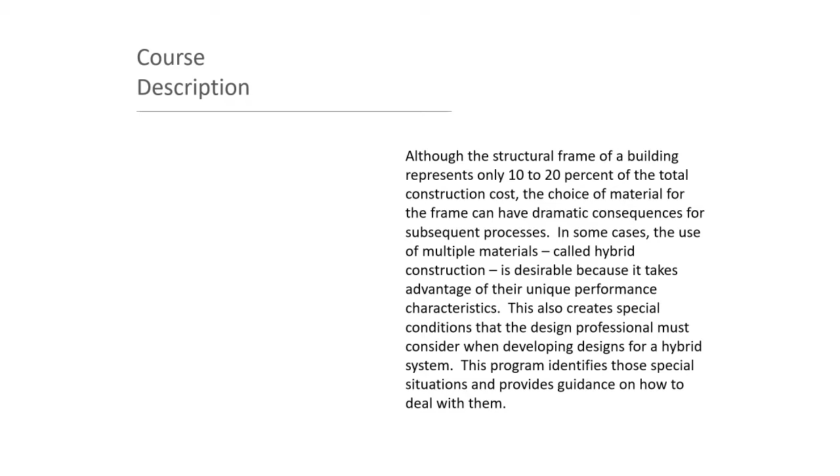The presentation will cover 4 primary objectives. Participants will have a thorough understanding of the following at the conclusion of the program: first, the circumstances under which a hybrid design might be desirable; second, the basic considerations when evaluating different materials and systems; also, the design process associated with hybrid structures; and finally, how to solve common conflicts associated with hybrid structures.

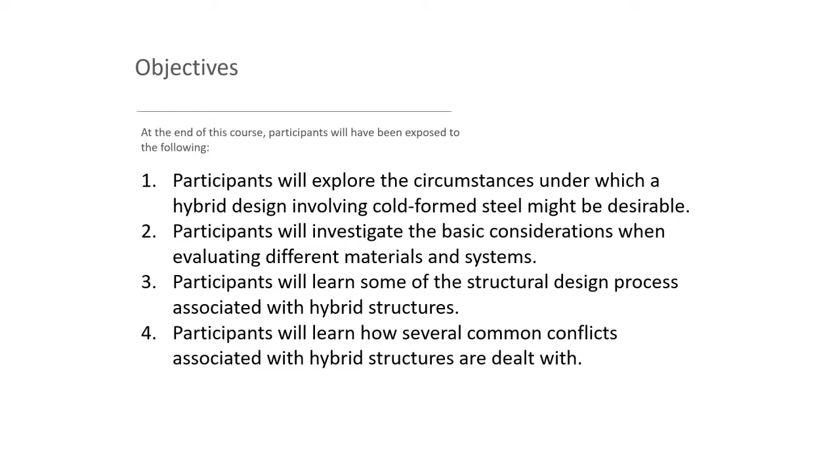The main structure on that car was cold-formed steel unit body construction, as was the case with many post-1961 American automobiles. In the old days, before advanced automotive engineering, to create a convertible they would form the original car - in this case one of the last years of GM's beautiful A-body muscle car - and they would cut the top off. The roof essentially acted like the top flange of a beam on a unit body car, so cutting an entire flange off considerably weakened the structure.

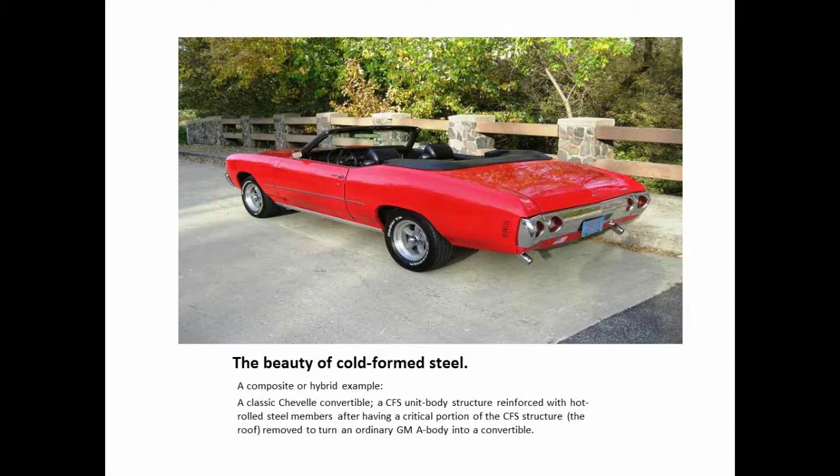In order to regain some strength, they would routinely take small hot rolled sections and weld them into the rocker panels on the sides of the car to help regain some strength. So this is, after a fashion, a hybrid cold-formed structure.

Now, regarding building structures, hybrid is defined as something heterogeneous in origin or composition, or composite. In the case of building structures, nearly every structure we do is a hybrid to some degree, or at least fits that definition. In this presentation, we're going to look at structures that use large, or at least significant, portions of different materials to comprise different portions of the overall building.

As far as the benefits of doing so, the designer is compelled to take advantage of the inherent positives of each different assembly. It almost goes without saying, because to do otherwise does not necessarily lead you down the road to using a hybrid structure, or at least making that a decision.

Walls, on the other hand, are amongst the most efficient load-carrying elements known to man. In the old days of architectural education, many of you - I know I was included - were taught in terms of lines and planes. C-stud walls are a plane, a vertical load-carrying plane, and as far as load-carrying capacity to mass, there is virtually nothing, at least that is commonly used, that is as efficient in the world of structural engineering as a cold-formed steel stud wall.

It also has relatively low cost versus other commercial, industrial, and institutional construction assemblies, for instance cast-in-place concrete, precast, or CMU, etc.

There's a potential high speed of construction using prefabrication. And frankly, in the world of cold-formed steel, or load-bearing mid-rise cold-formed steel, which is what we're dealing with here, if you are not prefabricating at least the wall framing on that project, frankly, you're not doing it right.

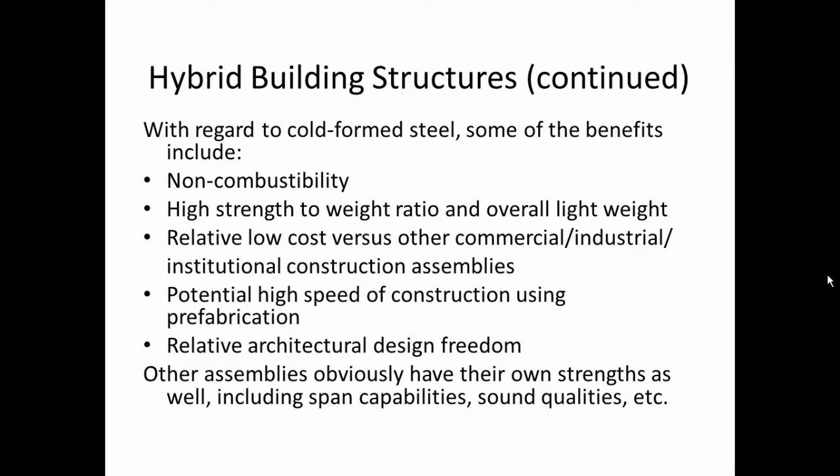Again, with regard to hybrid structures using cold-formed steel, there are several assemblies that are used with some regularity along with cold-formed steel as the primary structural frame. The ones we'll glance at today include cold-formed with precast concrete plank or hollow core, long span deck, and wood framing, which we actually won't touch on now.

The hybrid assemblies we've dealt with in our office that involve wood framing generally use the cold-formed for the strength advantage and the addition of a lower story or stories, and it's almost as if they're sort of cheating the system on the code. So we won't really talk about that very much.

Cold-formed with bar joists or composite joists, which nowadays can involve either cold-formed joists or hot-rolled steel bar joists as the composite joists. And then the one we'll actually spend the most time looking at, with a specific case study, is cold-formed with hot-rolled steel.

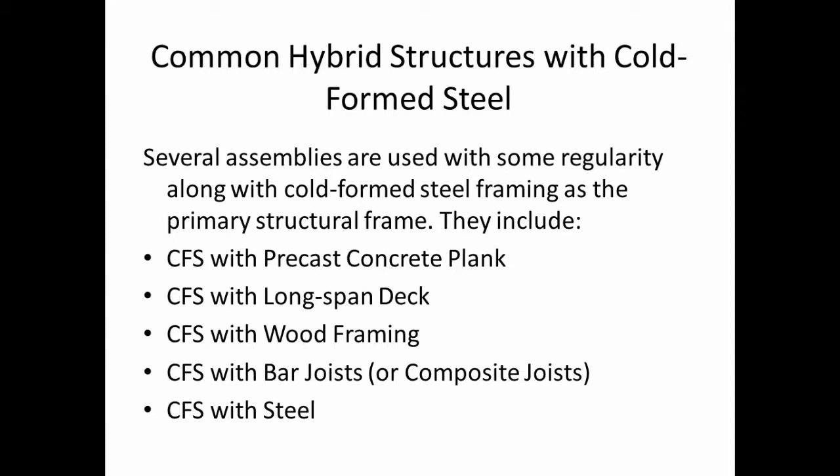This is an example of precast hollow core plank on cold-formed steel. It's a 3-story multi-residential building in Michigan. This is a photograph with all the framing in place, topped out, replete with cold-formed steel trusses. So the entire assembly, as you can see, is non-combustible.

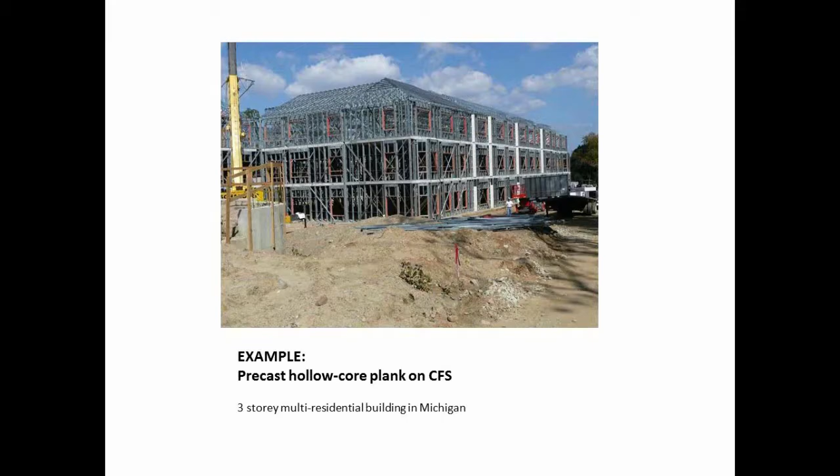Typically, with precast on cold-formed steel studs, which is becoming a fairly popular option in certain parts of the country, it involves steel stud bearing and exterior wall lines. The primary bracing, or the MWFRS bracing, is either provided by cold-formed steel shear walls, meaning they are clad, X-bracing, meaning they're essentially concentrically braced with strap, or reinforced stair and elevator cores. And the main floor spans, of course, are provided by the hollow core plank.

The positives on this system are efficiency in moderate to long spans. Precast plank can do a very nice job of spanning great distances at fairly shallow depths, 8 inches and 12 inches. And that span-to-depth ratio is excellent regarding the precast concrete.

The fire and sound rating capabilities are very, very good on precast hollow core plank.

The negatives, or at least concerns, include the requirement of soffits or drop ceilings for the MEP in much of the systems throughout the building. It's heavier, if not the heaviest, of all other cold-formed steel hybrid options. And trade coordination, which is obviously always required on a hybrid assembly, is required especially in this instance with regard to the means and methods of setting the plank on the cold-formed walls.

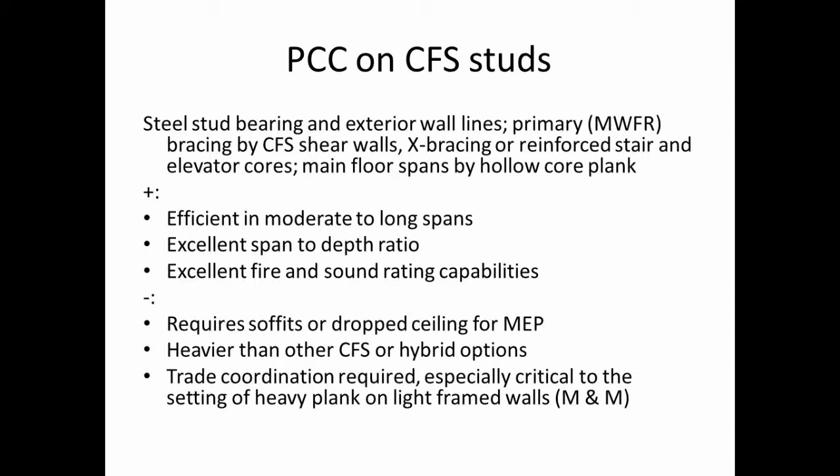My personal preference is to have a hot-rolled element, or at least a steel tube element, along the top of the wall to avoid damage from impact while the precast concrete is being set. Routinely it's done with just a very heavy gauge track at the very top, and that would be the very least I'd expect. But personally, I would prefer something very robust at the top of the wall to avoid problems, at least during the actual construction process.

Even though the strength is obviously there, it's been engineered to take the load. And they will not short that building on temporary bracing, which is a good idea, because it technically should be there until the building is entirely permanently braced. And you see the weld plates tying the precast plank, every other plank, roughly 8 feet on center, to the top of the stud wall.

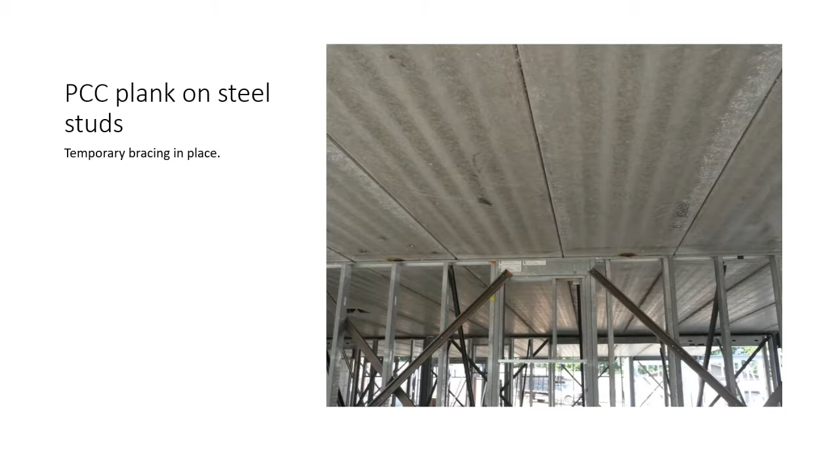The way they do that is alternate the embed plates on each plank, and then checkerboard the plates from one side to the other. So the plank you see here that has no weld plate actually has a weld plate on the other side of the wall, and that helps capture the plank, keep it in place, and also transfer any lateral floor diaphragm shear into the walls as needed.

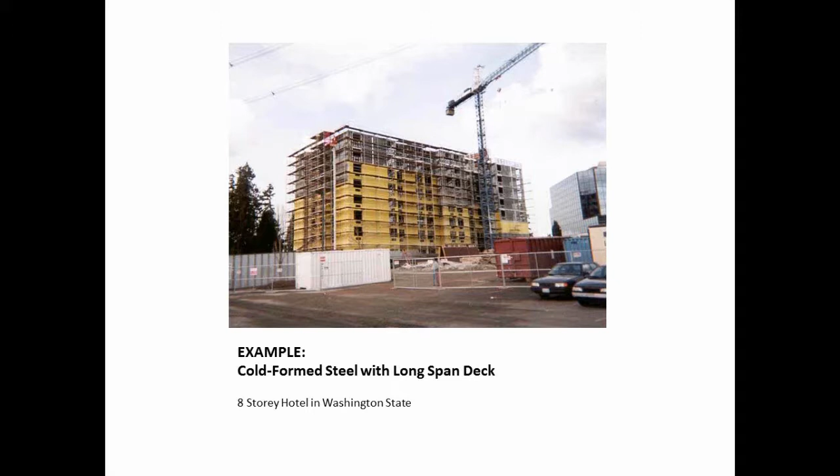In this type of assembly, you've got steel stud bearing and exterior wall lines. Again, pretty much the same thing. The primary bracing can be done again the same way, either by cold formed steel shear walls, X bracing, or reinforced stair and elevator cores.

One note regarding that - my personal favorite is the last one I just mentioned, which is either reinforced concrete stairs or CMU stairs and elevator cores. I really believe that's the way to go on any building greater than 5 stories, or at least any cold form primary frame building greater than 5 stories.

Below that, X bracing and cold form shear walls are entirely viable, at least if you can have enough of them located in line - and not plus or minus 2 or 3 inches in line, not plus or minus 2 or 3 feet in line, but exactly in line all the way from ground to sky. The beauty of an elevator core is, by necessity, it has to go in line perfectly all the way from ground to sky. And stair cores are usually done the same way as well.

Back to this assembly again, the long span deck provides the main floor spans. Now the positives here are a very good span to depth ratio. I would ordinarily call it an excellent span to depth ratio, except for the fact that the long span deck is generally relegated to short to moderate spans, room-sized spans, at least when it's being done reasonably and without massive amounts of reshoring and things that add excessive cost to any given project.

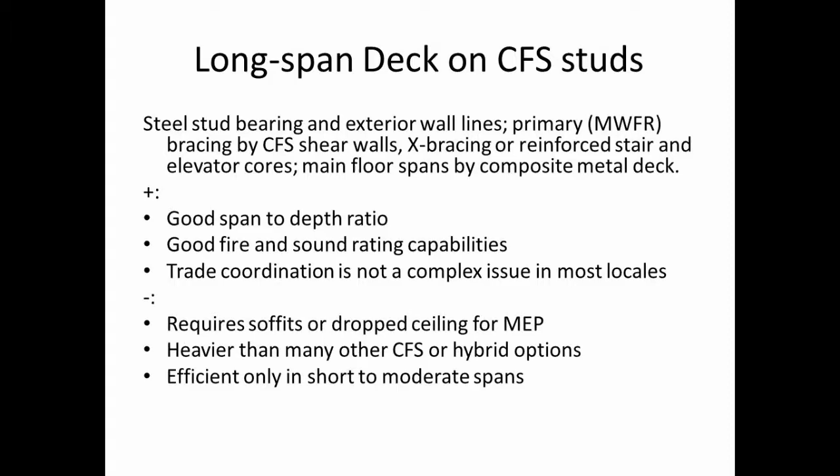That's critical in this case for what we call through load transfer. The through load transfer is relative to the stud load from above, which can become considerable by the time you get to the lower stories. It has to go through the structural deck and get down to the studs below. Generally you want something to be in direct contact. So that's how they solved it on this project.

Another alternative would be to have swaged ends at the deck, which is essentially the high points of the ribs being flattened out or crushed down so that the top of the wall can be cast solid with reinforcing, if need be, as a bond beam. Then you've got automatic direct load transfer, and the bond beam can actually help distribute the loads quite a bit as well, at which point you would not necessarily have to have alignment of studs and deck rib.

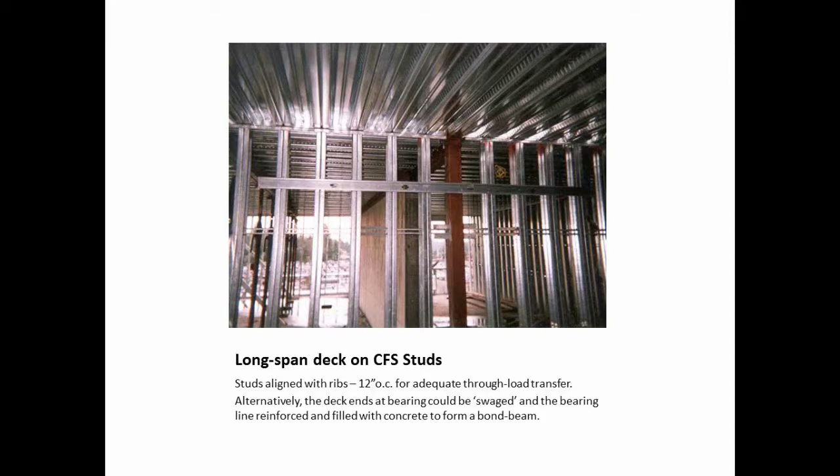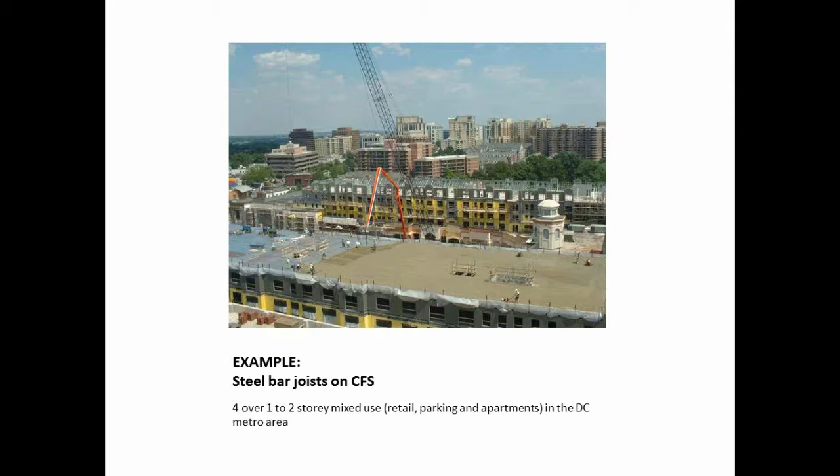This particular project is a 4-story apartment building over retail and parking, mixed-use occupancy in the metro Washington, D.C. area. Again, the steel studs provide the bearing and exterior wall lines, and the primary bracing is by any of these other methods. My personal preference is to use elevator cores or stair cores once you're above 5 stories or so, and the main floor spans are provided by the steel bar joists.

The positives here are the efficiency in long to even very long spans, so apartments, condos, hotels and that sort of thing can easily span from exterior wall to corridor wall with an assembly such as this. It's got a good span to depth ratio. You do want to maintain an L/20 ratio on the bar joist, just like on any routine structural horizontal member, but the benefit is that within that floor cavity you can contain all the MEP. This can be lighter weight than most, if not all, other cold formed steel or hybrid options.

The sound and potentially vibration capabilities are only fair, and we know of vibration issues that are a potential with bar joists in certain applications. Trade coordination becomes a little bit more of an issue with this type of assembly, as well as the through load transfer detail at the bearing line. Load distribution is a separate detail than the through load transfer detail - they both occur at the same location, but it's a separate issue.

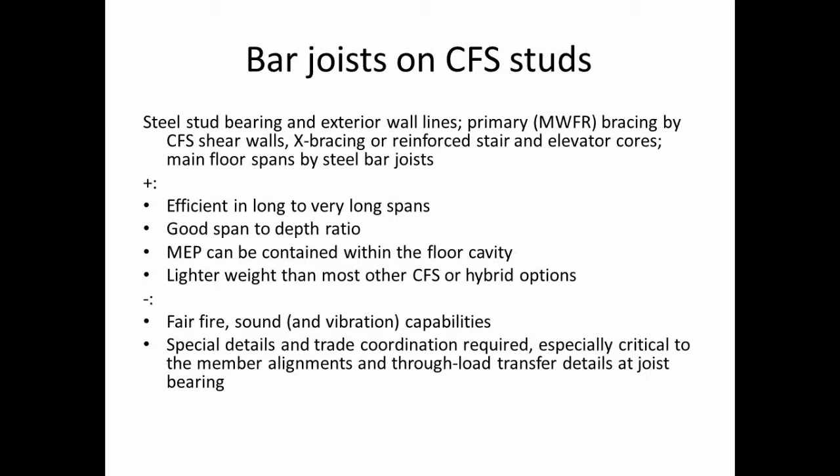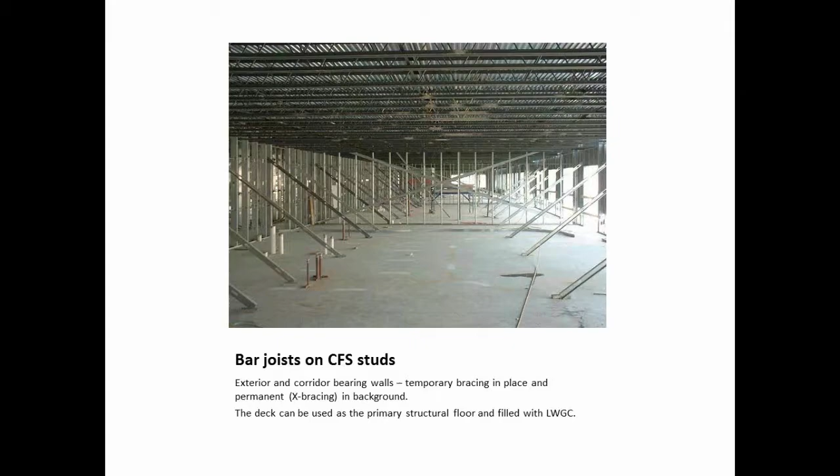As an alternative, and we have done several projects this way, the deck itself can be used as the primary structural floor, both for diaphragm and for gravity load, in which case the span of the deck and the spacing of the bar joist has to be reduced somewhat to the point where you can safely carry that load. The deck, for practical purposes, ends up being required to be a minimum 22 gauge. Then this can be filled with lightweight gypsum concrete, which has a couple different benefits - it's lighter, which can reduce all the members all the way down, including foundation reductions, which is always something that should be looked at with any cold form system because of the weight savings.

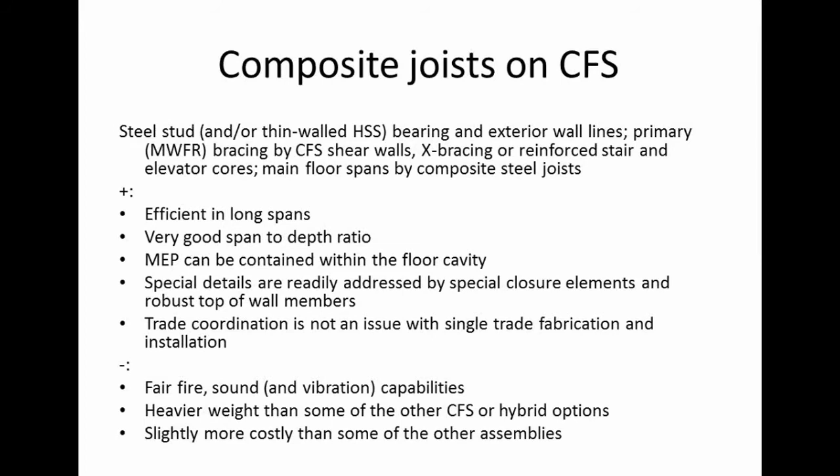Cement finishers are not required to finish the work - the Gypcrete guys install it. Supposedly it's self-leveling, although in these cases ordinarily it's very high compression, so it doesn't really level itself out. It has to be screeded off and squeegeed and so on, but it does not require cement finishers, so the cost is much, much lower.

And now let's look at composite joists on cold form steel. We'll look into this one a little more in depth, and there's a case study that follows this as well.

This is comprised of steel stud and/or thin-walled hollow shapes at the bearing and exterior wall lines. The primary bracing is provided the same ways, although, in my preference, once above a certain story height, I really believe in reinforced stair and elevator cores.

In this case, the main floor spans are provided by composite joists, either steel bar joists that use a specialized deck or an offset fastener, or nowadays by cold form joists that use one of the same methods, either a composite standoff fastener or an inverted dovetail deck, to gain the composite strength of the concrete deck.

The positives here are that they're very efficient in long spans. There's a very good span to depth ratio, obviously a little better than ordinary bar joists. The MEP can be contained within the floor cavity. Routinely, the floor cavities are on the order of a foot or more deep, and special details on some of these proprietary systems are readily addressed by special closure elements that they make.

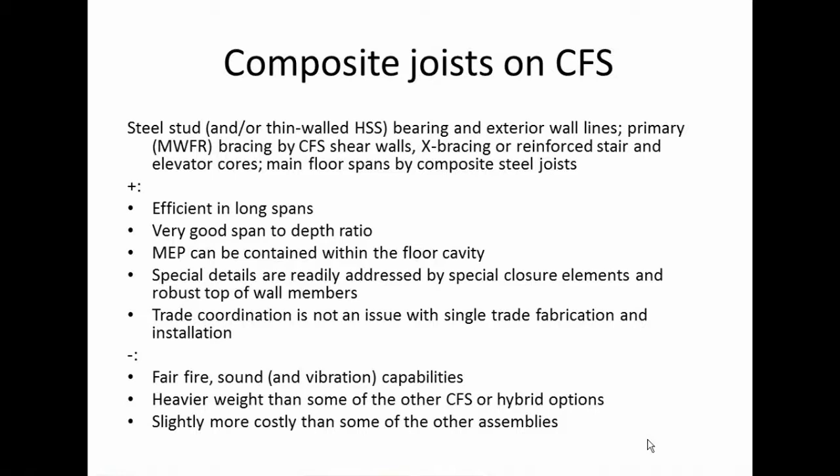The case study sample here is Brightview Tenafly, senior housing in New Jersey. This building was only finished recently, it's not finished yet in fact. It was topped out and the exterior finished and enclosed. It looks finished at this point, but it got to that point just earlier this month.

This is a shot of a crane swinging the panels in place. Each of those verticals happens to be a cold form tube that is smaller than the wall cavity, a hot rolled channel running across the top, a very heavy gauge bottom track, and then some very thin gauge steel studs on the exterior, either 18 or 20 gauge studs, fastened alongside the tube to help with stiffness and to fur the wall out to pick up the cladding and the interior sheetrock eventually.

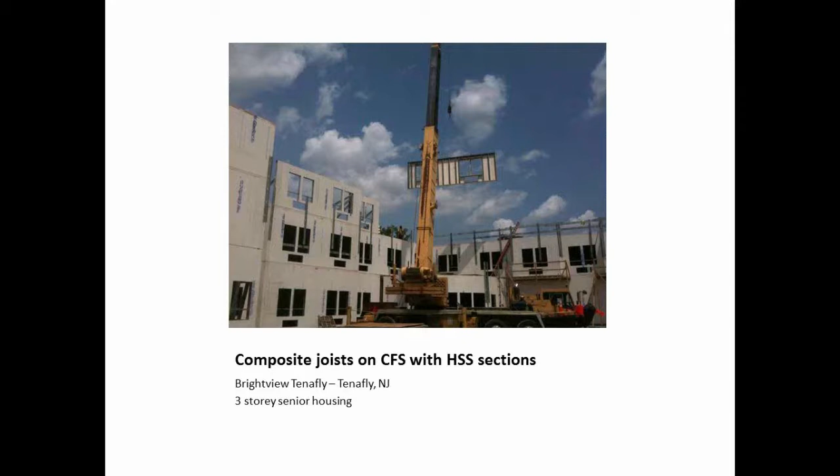Here is one of the floor plans for that building, and as you can see, there are plenty of irregularities within that floor plan. Bay windows, bump outs, special headered conditions that cold form studs, or at least some manner of cold form light frame wall, can accommodate very readily.

Shear walls in this case—I'm trying to remember if these were diaphragm rated shear walls or if they were X-braced. I think they were X-braced walls, but you can see some of the dark lines running perpendicular to the bearing lines, and those are typically shear walls in this project.

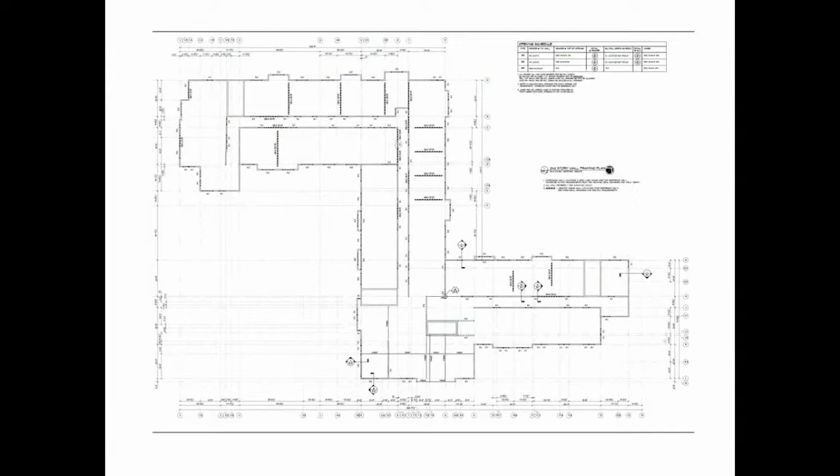Here's a scene of the ironworkers setting an interior panel, and you can see the hot rolled channel on top and the vertical gauge tubes, which, like many things that ironworkers prefer to install, comes unpainted or unfinished, at least ordinarily it does. The hope is that the building is enclosed and the moisture in the air and within any construction is normalized in a big hurry, or at least in short order.

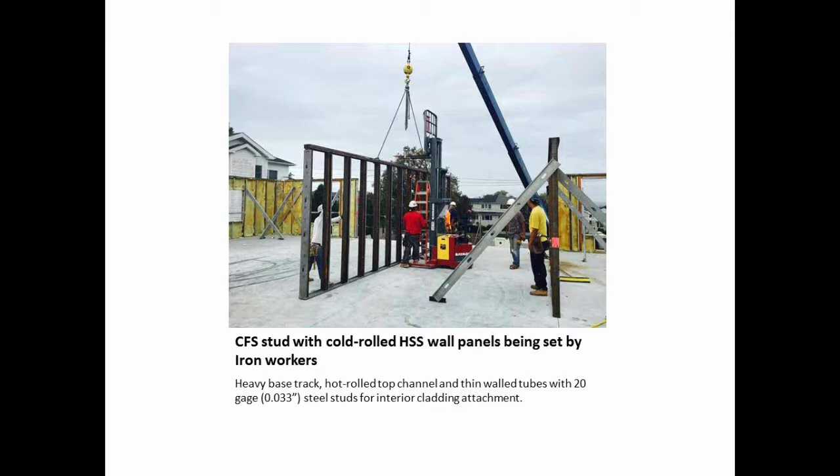Again, it's a heavy base track, in this case typically 14 gauge, a top miscellaneous channel to distribute the load and to provide a construction load base for the bar joists, and thin-walled tubes with interior studs typically being 20 gauge. Exterior studs are routinely heavier depending on the finish and the required stiffness.

Here is one such top detail. In this case, these vertical tubes are recessed 2 inches from the very front of the wall and 1 inch from the inside of the wall for a couple reasons: to fit the miscellaneous steel channel, and to allow 2 inches of spray-in insulation to go continuously outside the tube. It's directly up against the steel studs, and it completely fills this cavity on the outside.

The bar joist seat in this case, with this particular composite joist system, sits up into the cavity, but they do also use, with some of the systems, saddle seats, which are essentially angles turned the other way, and this becomes a solid pour of concrete within this area.

Again, this detail takes care of a lot of sins. The through load transfer issue essentially goes away. Load distribution is enhanced greatly by this detail, and again, it can be done this way or deeper, with an ordinary bar joist seat.

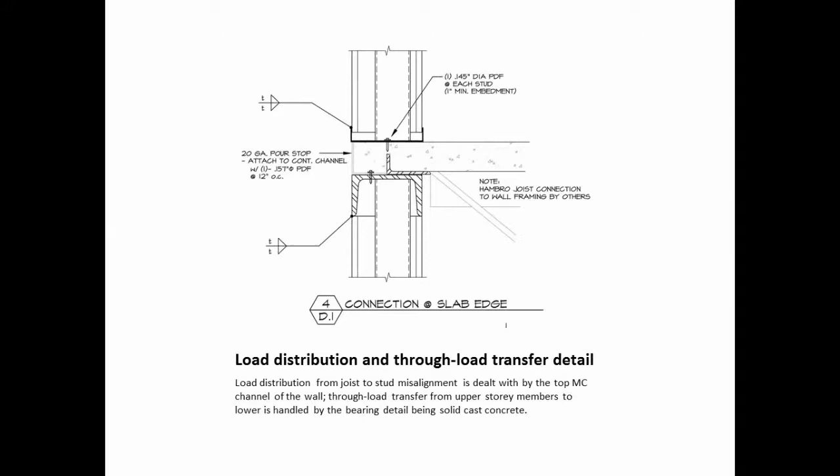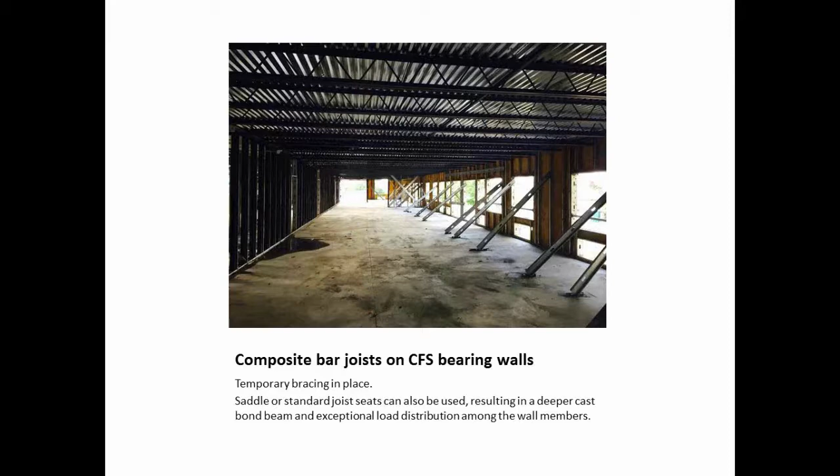And there is a photograph of that building, and it's actually a 3 or 4 story plus building in some locations that you can't see, and it does look quite finished. This photograph is from earlier this month, right after the last decent snowfall that hit the East Coast.

At this point, I will pause for any questions. Larry, are there any questions hanging out there for me right now? I don't see any on the chat screen. If anybody has a question, this would be the time to ask it. Raise your hand. Oh, we do have one. I take it back. Nope, I don't have a question.

All right, good. I don't think anybody will complain if we finish early.

Part 2 is going to be a single case study, an example of a system that I really, really like, and we've only done this once or twice. I really would like to do more of these. This, like some of the other projects we were engineer of record on, which admittedly helps matters. However, I don't see where there would really be a problem for the engineering design of the cold form being done by somebody providing a deferred submittal on this project for only the cold form steel.

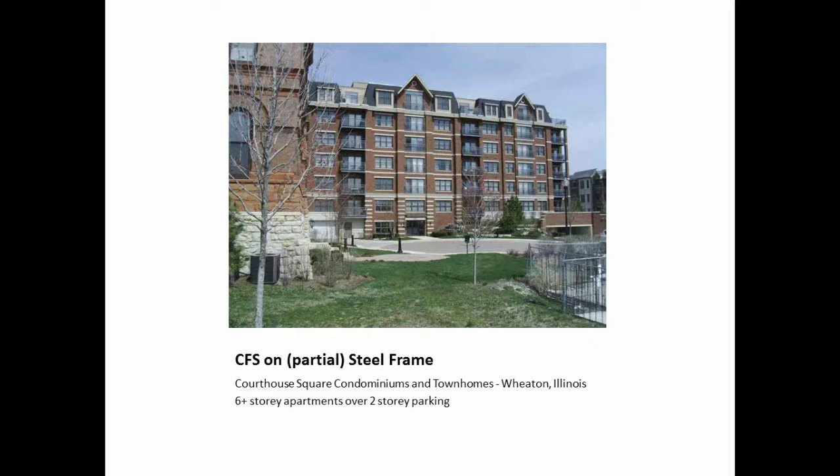On this type of structure, we again have steel stud bearing exterior wall lines. We don't have, in this instance, any interior bearing lines. This project uses C-joists for the primary floor, and the main wind force resisting bracing, a term also used for seismic for some reason, was provided by cold formed steel, a combination of cold formed steel shear walls in this case, and reinforced stair and elevator cores. We did not use the steel rigid frame to resist lateral forces on this, mainly because we could do it with shear walls in the same instance.

Now this is efficient in moderate to long spans, mainly not long to very long spans, as I would say with the bar joist or composite systems, because this uses C-joists. And C-joists, while very strong and lightweight, are not nearly as efficient at their job as C-stud walls are.

But you can still get a very good span to depth ratio, and in the instance we had here, we used, I believe, 14-inch C-joists, and the MEP was contained almost entirely within the floor cavity as well. The typical details are common cold form steel construction details.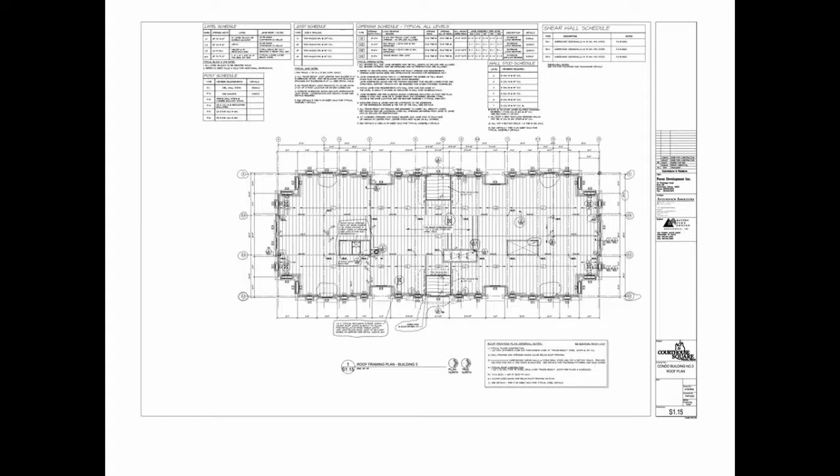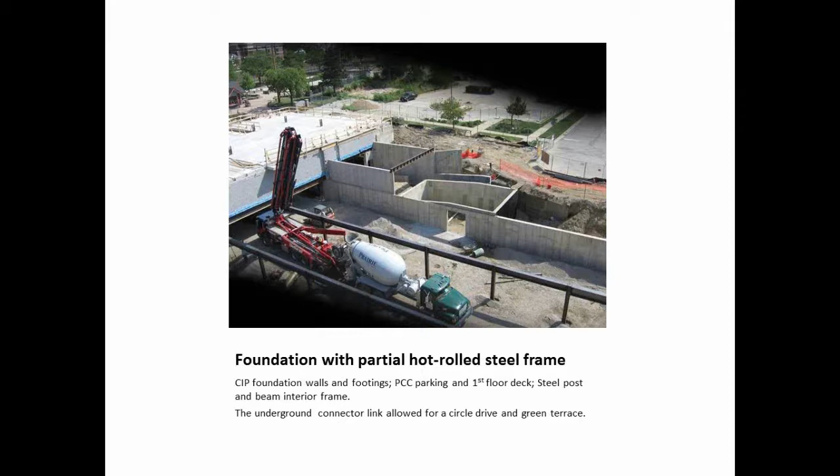But the link was designed to have terrace loads, so this would be precast, a green area, a parking turnaround, and grass and everything else until you got somewhere in here and a new building would pop up. Over on the left, you see the lower two stories, which is essentially foundation and precast on steel, and you can see the steel column stubs at the interior of the building poking up.

Now, what goes on here from here on up is very interesting, and this is a very, very good shot of this. It's an interior steel frame and exterior bearing walls, and then floors are C-joists.

And we could have even used a bridge beam and cantilever scheme to lighten up these beams even more, but they were fairly light as it was, and the contractor, as many iron workers do, prefer to go up at least 2 stories with their columns and then just rattle the wide flange beam framing into the sides of those.

So that's what we did, and even with that, we were fairly svelte with 14-inch beams, which allowed us to have a flush floor system with 14-inch C-joists, and then they spanned from that interior, those 2 interior beam lines, all the way out to the exterior lines. Corridor would be somewhere gerrymandering around in the center bay.

And what this did was to create a very, very open floor plan within the body of the building, and this particular tower was condos. So it allowed complete freedom for the breakup of the units and changes and everything else after the fact, which was kind of a key in that market, and this was done.

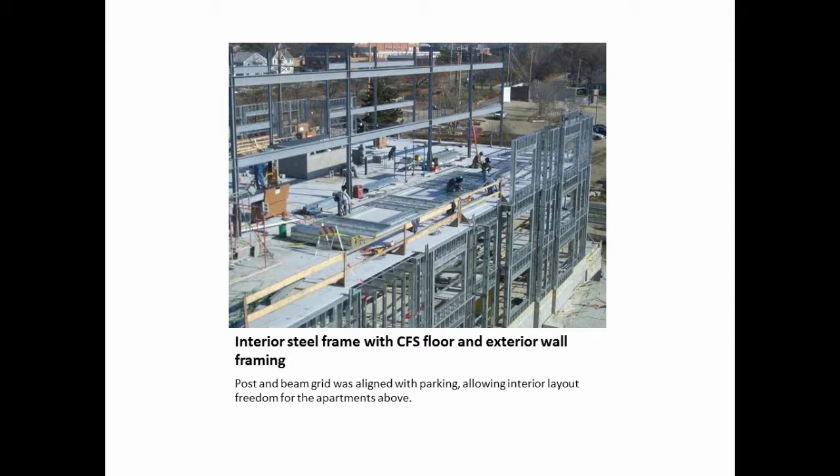And you'll notice a lot of welding. On the previous slide, if you look at that, you'll notice that there are welders doing the prefab work on the deck, or at least finishing up the prefab work on the deck. In the old days, welding was considered the way to go on many cold form steel structural projects, if not curtain wall projects, load bearing projects certainly.

Here we got higher, and again, the exterior bearing walls allowed for a lot of recesses and projections without any problems for the structure. You can see the steel frame projecting up above, and I think that next level up, the top of those beams, is roof elevation.

But the speed with which this went up is notable, because it didn't include just the walls, but the C-joists as well. And the C-joists were stick framed, one at a time. That's advisable most of the time anyway, because of tolerances and things like that. But the construction time was a calendar week to 10 days per story, including beams, joists, everything.

Typically the ironworkers would rattle up 2 stories of framing in front of the cold form guys. The carpenters would come in, the steel guys would be out of the way, and their work was not that heavy, that crane time was an issue or anything like that.

And it really went very, very well, at least until the top story. The top story was fairly complicated from an architectural standpoint, so it slowed them down a little bit. But that was the typical rate of construction, a week to 10 days per story.

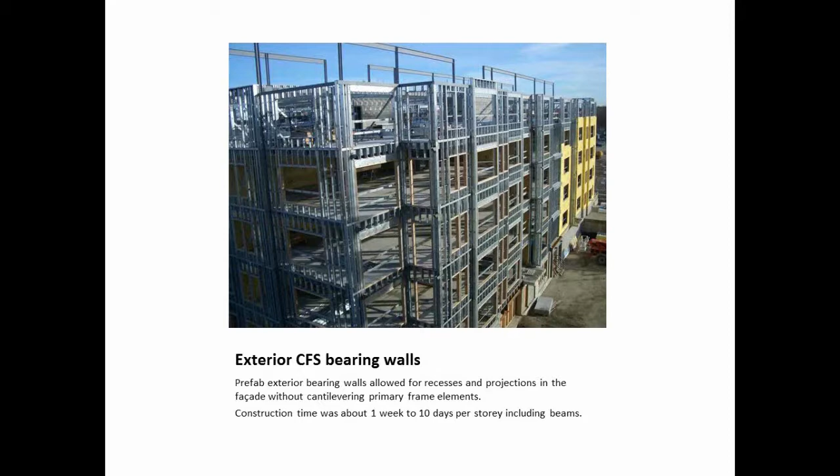So the C-joists actually come off the side of the wall. The walls are designed for that little bit of eccentricity. And the stud walls are designed to align floor to floor exactly within very, very close tolerances.

The C-joists do not necessarily have to align with the studs because the track can distribute that load from stud to stud easily. Typically nowadays they do align, but mainly for the purposes of MEP runs, electrical conduit runs that you want to go between a joist, for instance, not cut through the track and then find that you're landing directly in the middle of the stud.

One other point here is that this detail is shown steel to steel for all the connections, including the stud wall to stud wall. But the deck that was used here is a structural cement panel, and there are only 1 or 2 manufacturers of that, so I don't need to use the trade name. But it was tested for crushing capacity and found to be pretty good.

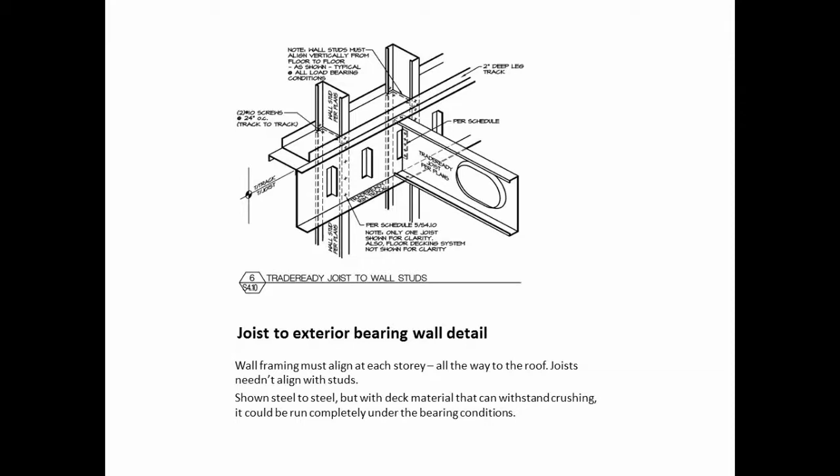One other point here, the brick veneer, which this project ended up being all brick veneer. I think you saw that in the opening slide on this case study. And that brick veneer was designed to go all the way to the foundation, or at least to the cast-in-place wall at the first level.

And the requirement for that is that it be engineered brick. The true requirements are nothing earth-shattering. You generally don't have to do anything different whatsoever. Slip ring ties that are specifically designed and called out.

Brick strengths that are almost always exceeded by the most mundane brick, and mortar types with prism strengths required of them that again are really no big deal, is all that's required. And drawing call-outs of all those things to show exactly how the brick is to be assembled, and then all loose lintels. You don't have to relieve the brick dead weight every 30 feet or every story once you're above 30 feet, and that's kind of a big deal.

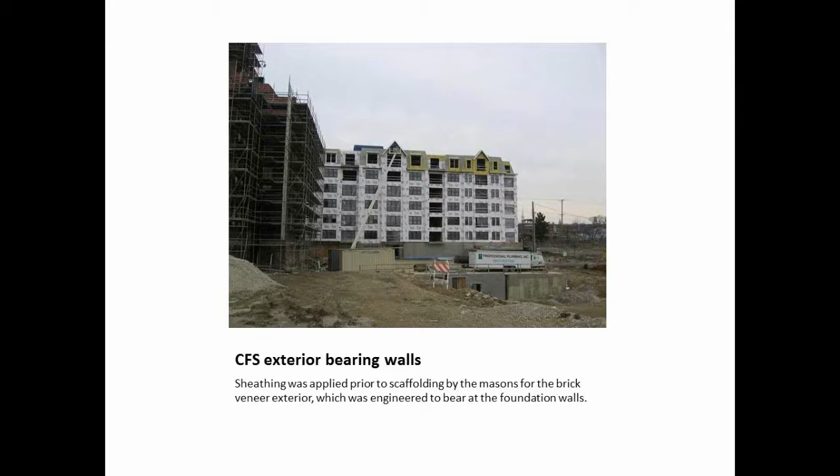The typical balconies at the recesses within the body of the building were done this way, where brackets were welded to the steel studs. Had the loads been any worse, these could have been hot rolled or cold formed tubes, but hollow sections nonetheless. These brackets cantilevered out through the brick. Soft joints would be caulked instead of mortar joints around these brackets, and then the balconies swung in and installed in one piece with railings, deck, and everything else if need be.

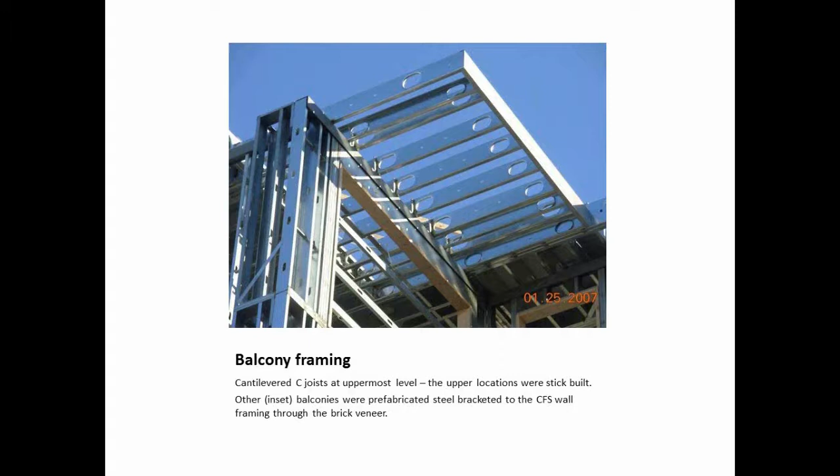The very upper level was not prefabbed because of some of these things. The mansard shape was all welded, all these articulated joints were welded, and these members were non-bearing, thank God. Where we did have any sloped members that were bearing, which was not that many, there was actually another straight member, and we just had to resolve the resultant forces out of it, but we didn't do any with an articulated joint. This would typically occur at the sides of a large framed opening where we would create a cathedral ceiling or something like that. So these sections of the walls were not bearing.

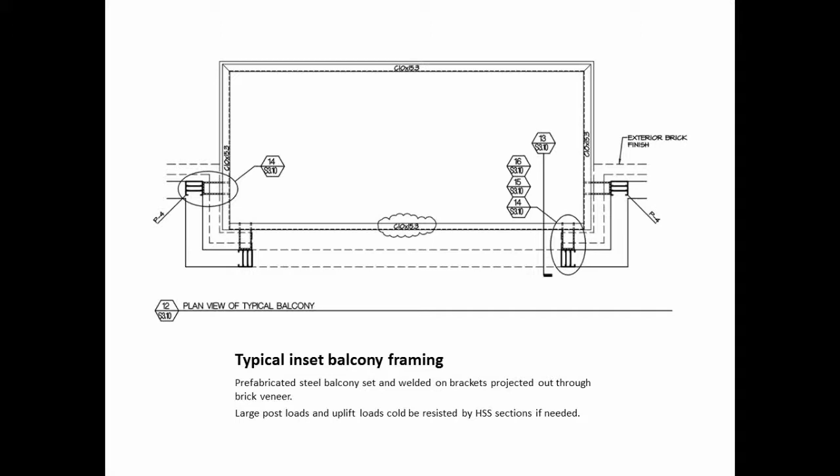Here are some of those details, as you can see. This is entirely because it's a sidewall. But where it would have been a load-bearing wall, it would have been here, and the load-bearing sections would have been outboard of these particular details. Again, you'll notice all the welded connection details.

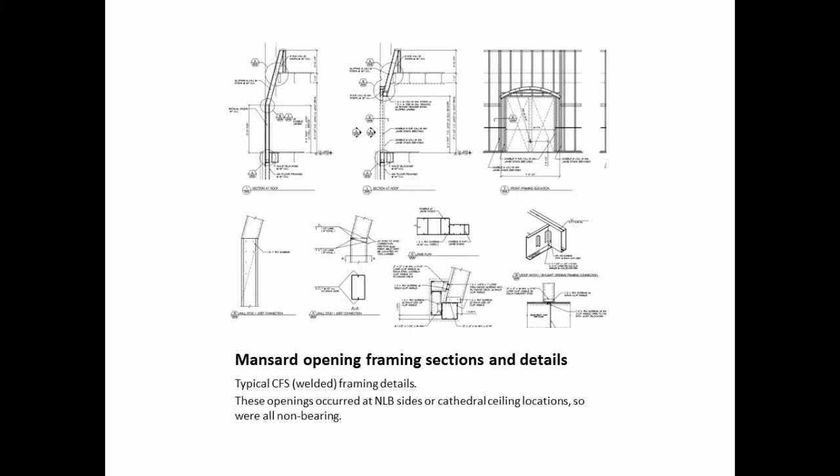Here's the upper level cathedral dormers, and again the cold form steel system allowed for another architectural feature. That's just not that easily achieved with many other systems.

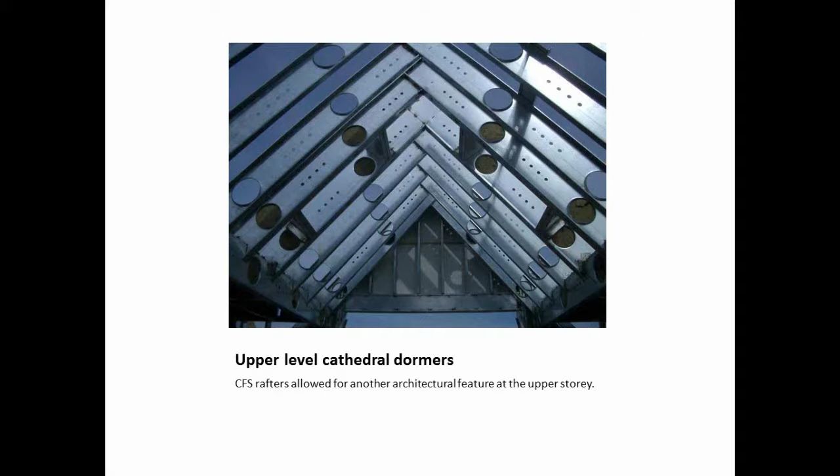And with that, I will make a summary, and we'll do some final questions and answers, if any.

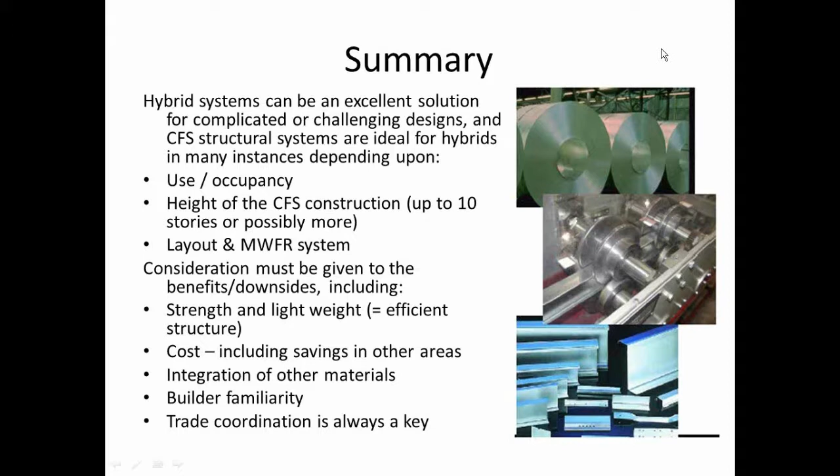To summarize, hybrid systems can be an excellent solution for complicated or challenging designs, and cold form systems are ideal depending on the use and occupancy. Certain heavier occupancies or heavier load occupancies can lead you in a direction of different systems, of course. The height of the construction—cold form in mid-rise construction can handle story heights of 10 and even more. We have not done more than 10, and you become pressed, especially with a layout that is not very regular, and without an MWFR system that aligns from ground to sky.

As I had mentioned before, my personal preference for anything over 5 stories is to use reinforced cores, elevator or stair cores. Considerations should be given to the benefits and downsides, including the strength and weight of cold form steel and costs associated with that, primarily in the supporting structure or the foundation. You should always be looking for those.

Larry would also bring up different areas such as insurance and things like that, and I think a lot of those things are going to come to the fore in the near future as well—integration of other materials, good or bad. Builder familiarity is generally a consideration, and a strong one for cold form steel. And then the older I get, the more I think trade coordination is just such a big deal with cold form steel, and with most of these projects that was certainly the case.